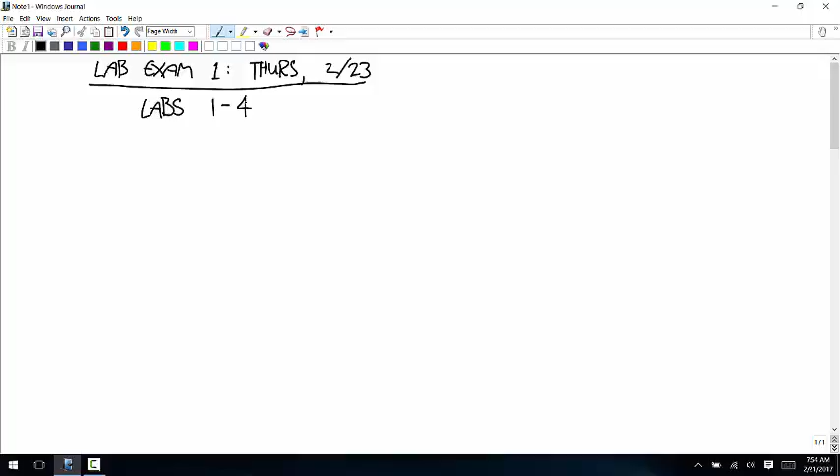Okay, so there will probably be 1 or 2 questions on that. And what I want you to remember is just the basic trends, not about the method or anything, but just what did we find. So if you remember what we found, that was the one where we used a spreadsheet to calculate how long it would take an object to fall a certain distance without air resistance and then with air resistance, and you could compare and see in each specific case how much air resistance would affect the amount of time it took.

Let's see, what we found was, first of all, when we changed the masses, we did objects that had the density of steel, or lead was the one we did, and then aluminum, and then cork. So things that were the same size, but the mass was less and less. And when we dropped those from 1 meter, even the difference between lead and cork, air resistance didn't really change anything, right?

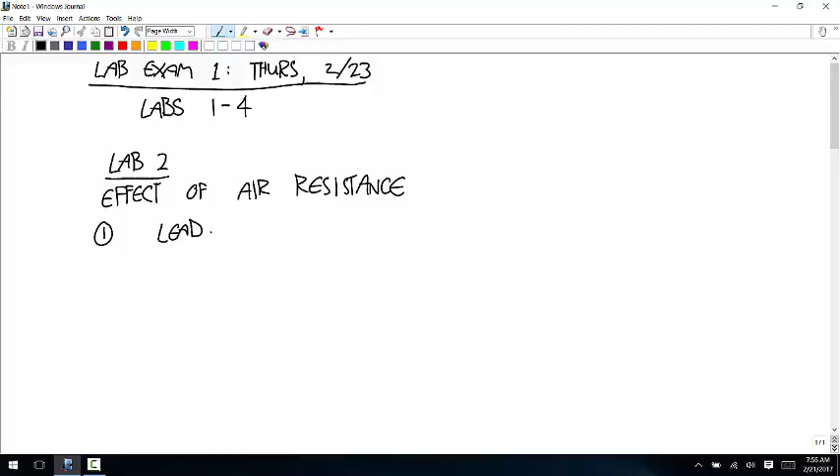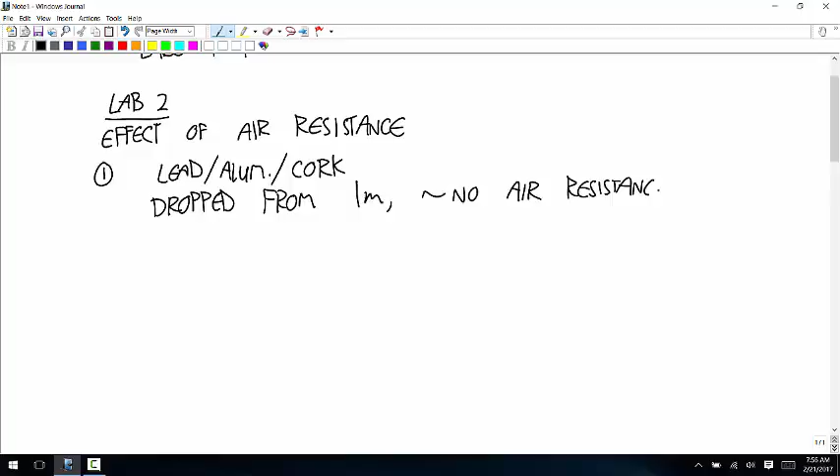So, lead, aluminum, cork, when we dropped it from 1 meter, there was essentially no air resistance effect. All 3 of those objects would have hit the ground at the same time.

And then those 3 things, when we dropped it from 10 meters, it still was a very minimal air resistance difference between the lead and the aluminum. The cork was a little bigger, but I think it was still pretty small. I don't remember exactly what it was. Maybe it was like a 4% difference or something for the cork. There was essentially no air resistance effect for the 2 metals.

And there was less than a 5% difference for cork. So even dropping them from 10 meters, there just wasn't much effect.

And then the next thing we did was we kept the mass the same and changed the surface area, the radius of the sphere. And what we found was, I think the two sizes were like a tennis ball. So we talked about an object that had a mass of 1 kilogram, and it was a tennis ball size compared to a basketball size.

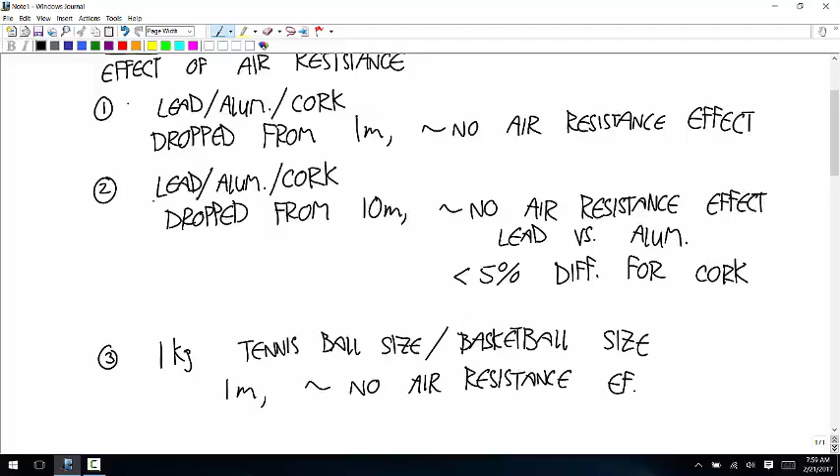And when we dropped it from 1 meter, there was basically no air resistance effect. When we dropped it from 10 meters, I think there was about a 10% difference. That was the biggest difference we saw in the whole lab.

So if you had to sum up all the results in one sentence, the most basic result from the lab was dropping things from 1 meter, 10 meters, air resistance didn't have that much of an effect. It probably had less of an effect than you would have guessed going into it. Other than that, there are some little differences you could notice, but basically I think the questions I'm going to ask are going to boil down to the fact that there wasn't much difference for those. You have to get things to a higher speed than that if you're going to make those kind of changes in density, those kind of changes in radius, in order to see a big difference due to air resistance.

Any questions about that particular thing? Okay, so that's kind of lab 2 in a nutshell. Any other questions about the lab test?

This is particle kinetics.

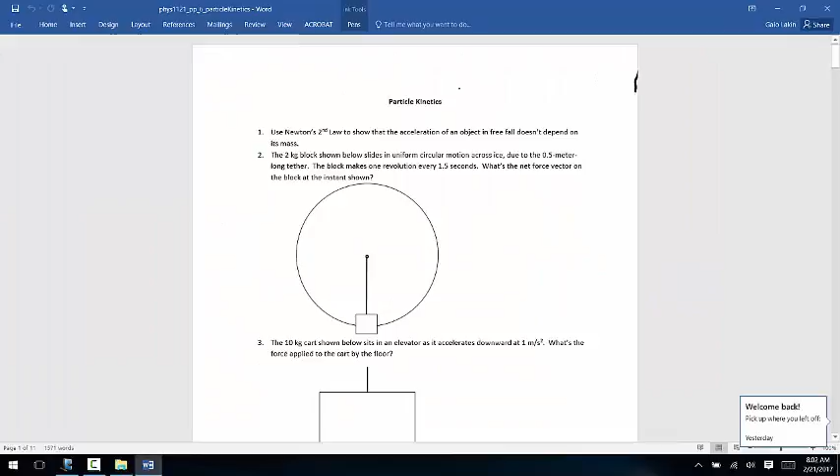Okay, so number 8. A car is accelerating backwards. It gives you the acceleration of the car, and a coffee cup falls. What acceleration would the coffee cup have according to the person driving the car? What would it look like?

First, what would its acceleration look like to someone outside the car? So somebody's looking at this thing going by as the coffee cup falls. They measured it or videotaped it. What would it look like the cup and the fluid in the cup was doing? And second, what would it look like to the person inside the car?

And third, which of those is suitable for using Newton's second law? So those are two different measures of acceleration. The person on the street sees an acceleration, the person in the car sees an acceleration. Only one of those is acceptable for using in F equals ma. And then the last part is calculate the net force.

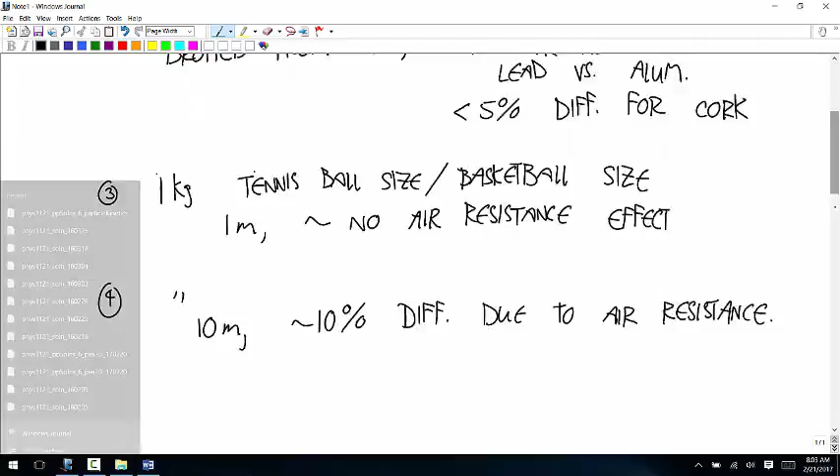Okay, so the car is accelerating backwards at 4 meters per second squared. Number 8, particle kinetics.

Okay, so a car is going this way. Let's say this is the positive direction, usually this would be the positive x direction. It says the acceleration of the car is -4. So is the car speeding up or slowing down? This car slams on the brakes. The acceleration is this way at 4 meters per second squared.

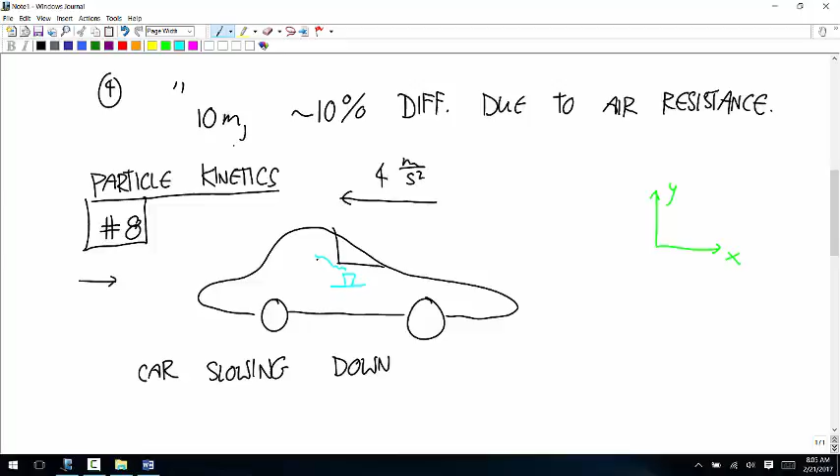Inside here, there's a coffee cup that falls off the dashboard or whatever. So part A: what's the acceleration observed by a camera on the ground?

You know, outside the car. And anything in free fall to a camera that's fixed to the ground, the acceleration is just down at 9.81 meters per second squared. So acceleration of the cup relative to the ground is just 0, -9.81 meters per second squared.

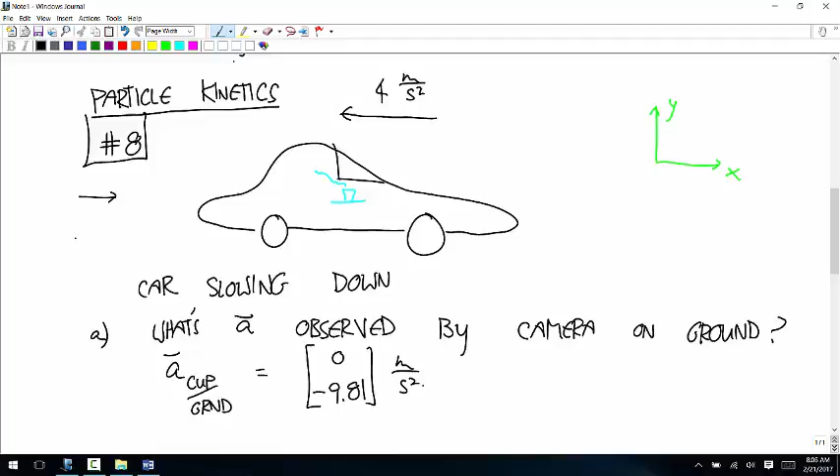So now, what's the acceleration observed by a camera in the car? The relative motion equation says acceleration of the cup relative to the ground is equal to the acceleration of the cup relative to the car plus the acceleration of the car relative to the ground.

So 0, -9.81 is equal to the acceleration of the cup relative to the car plus the acceleration of the car relative to the ground. This acceleration was given. It's 4 meters per second squared in the negative x direction. So this is just -4, 0.

And so the acceleration of the cup relative to the car, just do the algebra. You can add +4, 0 to both sides, and you get 0, -9.81 plus 4, 0. And so you get 4, -9.81.

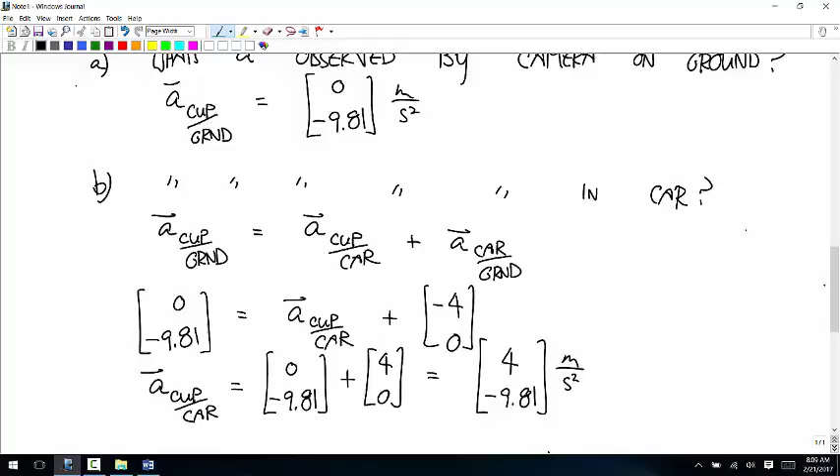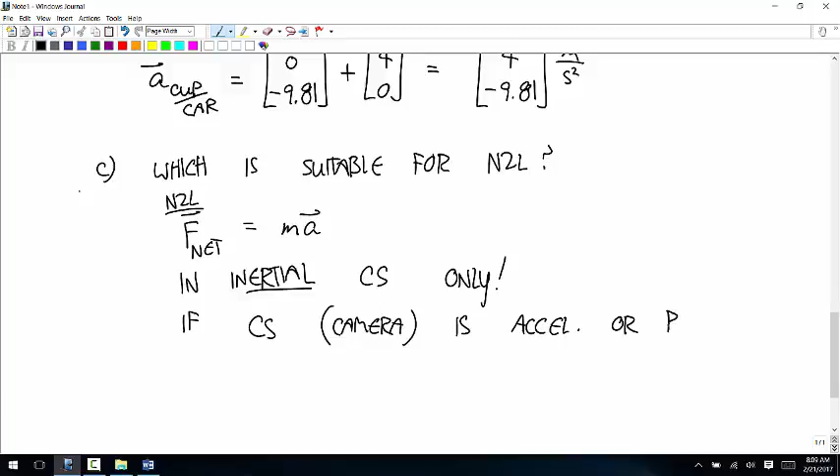You have to use inertial coordinate systems. It's called an inertial coordinate system. It doesn't work with coordinate systems that aren't inertial. So what that means is if the coordinate system—and you can think of that as the camera—is accelerating or rotating, you can't use its acceleration in Newton's second law. Exclamation point.

Okay, so which one of those two cameras is accelerating or rotating? The one on the street, on a tripod, or the one that's mounted to the car? The car. The car is accelerating—I told you what that acceleration is. And so the camera that you use inside the car, you can't use that data for Newton's second law. So this acceleration of the cup relative to the car, that's no good for Newton's second law. The acceleration of the cup relative to the ground, that is good for Newton's second law.

Well, actually, we'll talk about this a little more when we talk about gravitation. But it turns out a camera that's mounted to the ground isn't an inertial coordinate system either, because the Earth is rotating and hurtling through space. But the speed that it's rotating is really slow.

People are capable of putting together careful enough measurement equipment that you can tell the Earth is accelerating. But for most measurements, it's close enough to being an inertial coordinate system that we can use it.

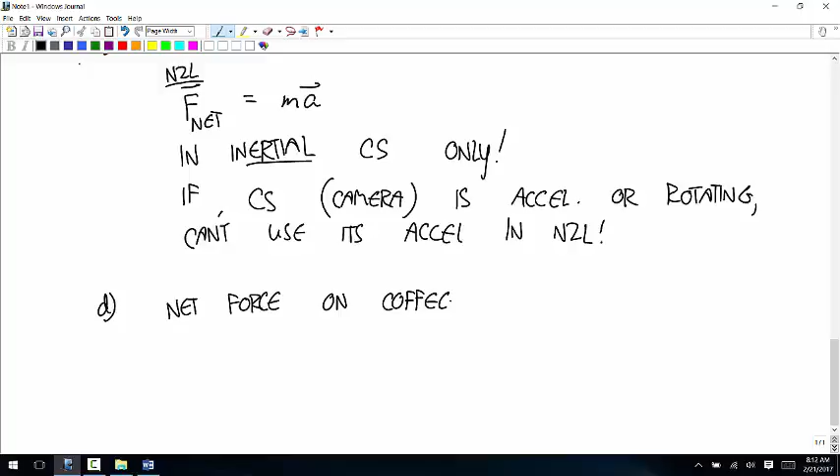Well, this is going to be sort of underwhelming. The net force is equal to the mass of the coffee cup times the acceleration of the coffee cup in an inertial coordinate system. So that's 0, negative 9.81, or we can write that as m times 0, negative g. So the net force is just 0, negative mg. The only force on the coffee cup is the weight.

Sometimes there are cases where it's useful to measure what forces it appears like are happening. These are like fictitious forces - to somebody inside the car, it would look like there's a force acting on the coffee cup accelerating it forward. You hear people talk about that stuff, and I think you hear about those kinds of things more often than you should, just because it's a more fun way to think about it - like there's this imaginary force making the thing accelerate.

But this is really the true story: you find a coordinate system that's inertial, that's not accelerating, you measure the acceleration in that coordinate system, and then use that to give you the true forces acting on the thing.

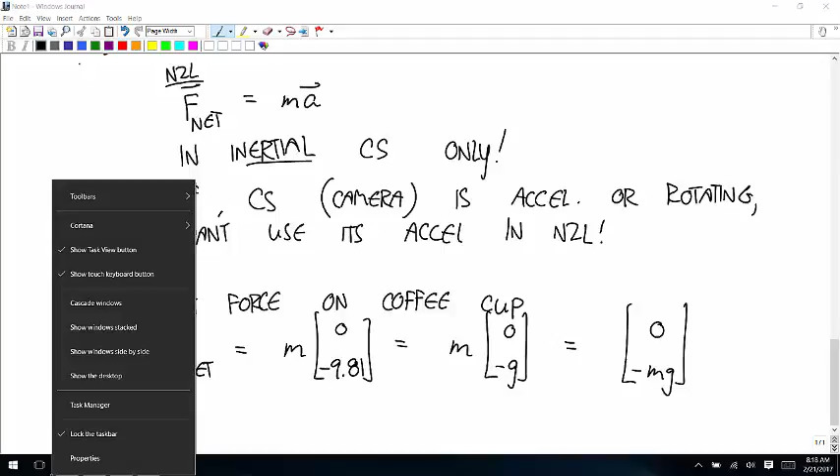Okay, so in this one, we're given the force vector as a function of time, and we're just asked to figure out the position vector as a function of time. It doesn't tell us the mass. The function is t, negative 3t.

So the force as a function of time is t, negative 3t. And since it doesn't give a mass, we'll say the mass is m. Newton's second law says, and this is the net force, F net is equal to this at any time. So Newton's second law says t, negative 3t, that's F net, is equal to the mass times the acceleration.

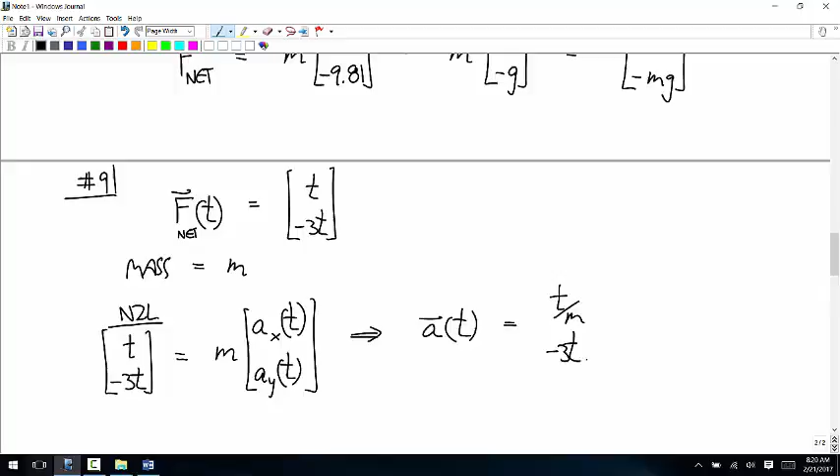I'll break it up into x and y components as functions of time. And so the acceleration vector as a function of time, you can solve those two equations just one by one, is t over m for the x component and negative 3t over m for the y component. So that's the acceleration.

Any questions about that part? So if you're given acceleration as a function of time, you can use Newton's second law to calculate net force as a function of time. If you're given net force as a function of time, you can use Newton's second law to calculate acceleration as a function of time. And then from there,

it also tells us that its position and velocity are 0 at time 0. So v of 0 is the 0 vector, and p of 0 is the 0 vector. And now we're just going to do the differential equation, integrate the acceleration to get the position. The velocity is the integral of the acceleration. So velocity as a function of time is the integral of the acceleration with respect to time.

So that's t squared over 2m plus c1, and negative 3t squared over 2m plus c2. That's the velocity vector.

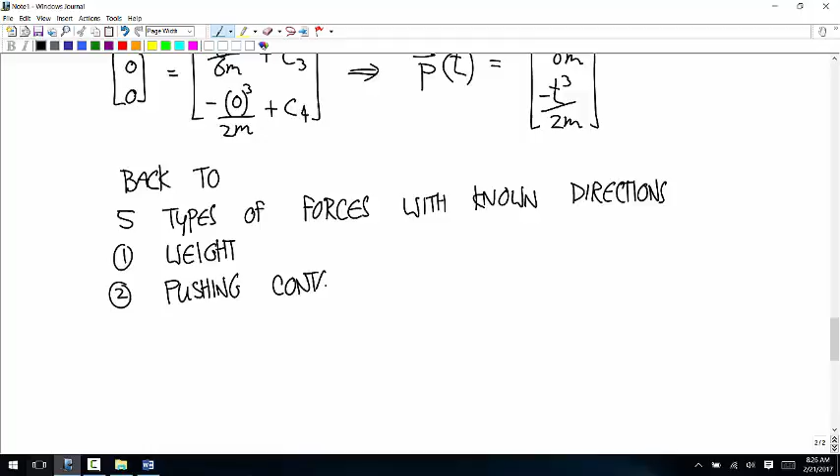These are, the first one is the weight. That's the easiest one. The second one is pushing contact. The third one is pulling contact. Usually, but not always, this involves cables, strings, and ropes. The fourth one is friction. And the fifth one is springs. Who remembers why we deal with springs?

Yeah, that's right. So in a lot of branches of engineering, like mechanical engineering, aerospace engineering, civil engineering especially, you deal with the elasticity of engineering materials. And springs are your first glimpse at dealing with this idea of elasticity. What elasticity means is if you apply a load to something, it deforms, and as soon as that load is gone, the deformation disappears.

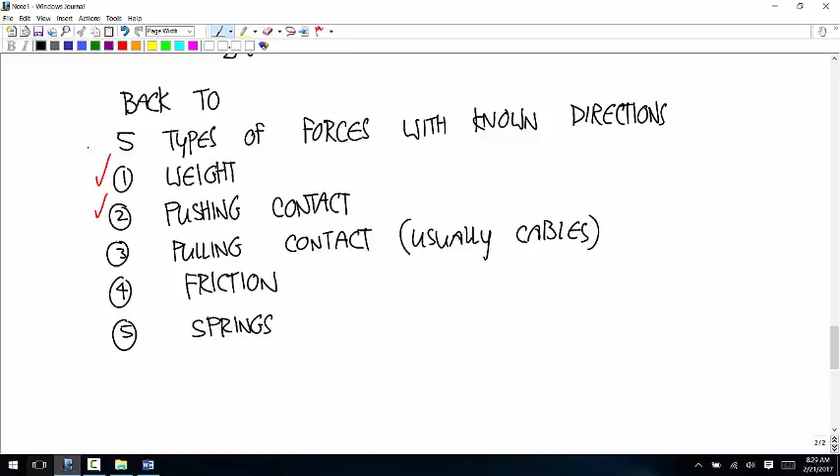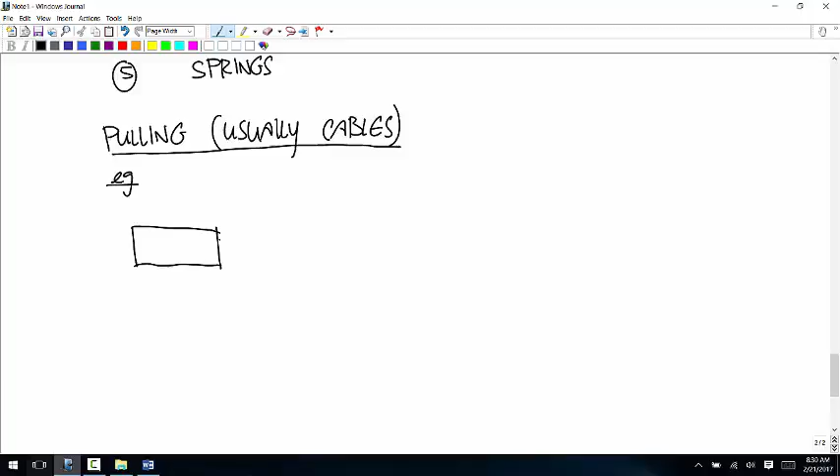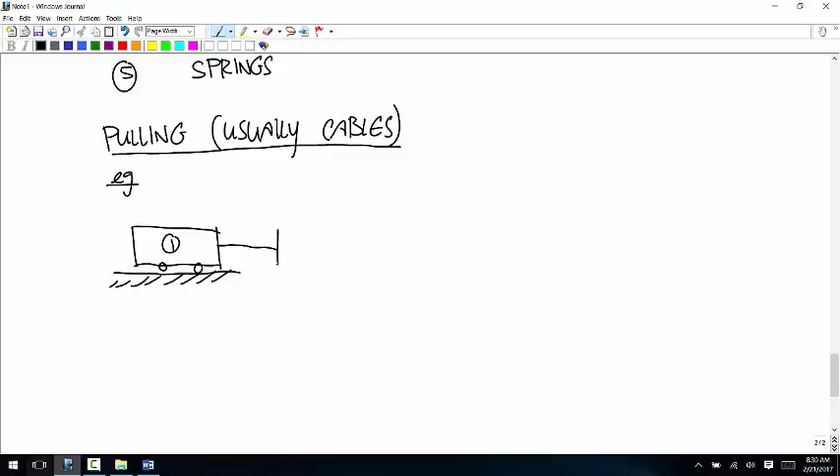So pulling, usually with cables. For example, the kind of problem that we'll see is if you have one cart rolling along the ground, connected by a cable to another cart, and then you apply a 50 Newton force here. Then, for example, what's the force the cable applies to cart 1?

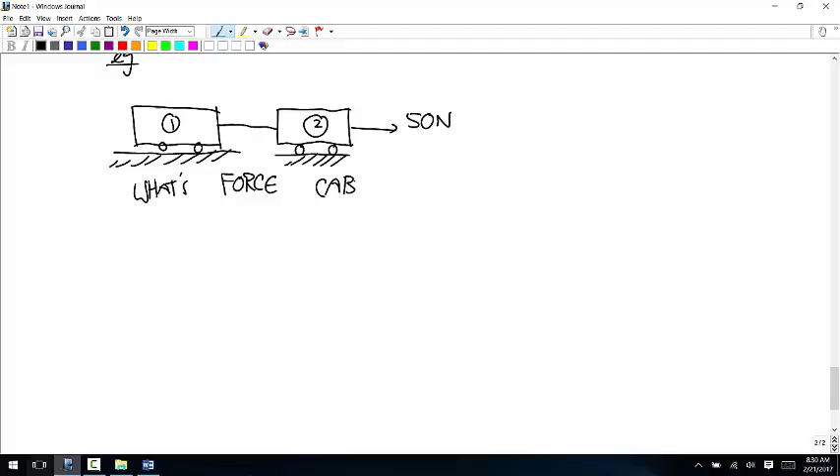Okay, and the rules for a pulling contact: the pulling force direction is parallel to the cable, and away from the chosen body.

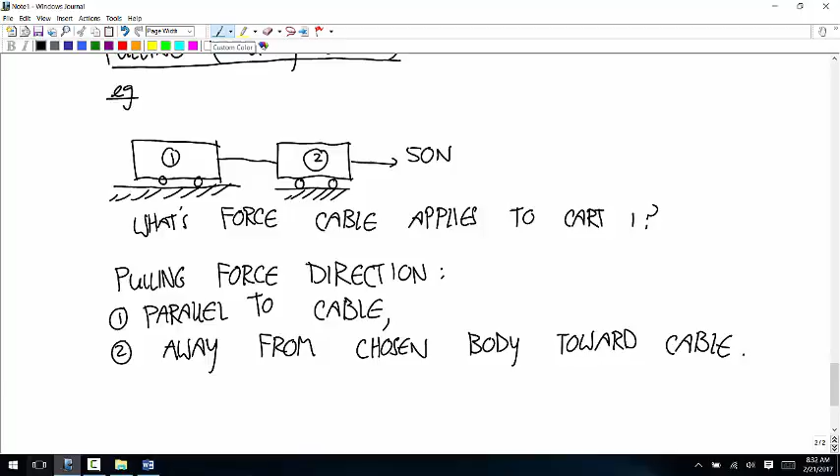One way to always get this right, that I think is helpful a lot of times in really complicated problems, is this: when you choose the body to isolate, you can imagine including just a tiny little bit of that cable that's connected to it. So you include a tiny bit of cable in the chosen body, and then the force applied by the cable acts straight out of, I'll call it the stump, a little tiny piece of cable, straight out of the stump. Okay, so let me show you a picture of what I mean.

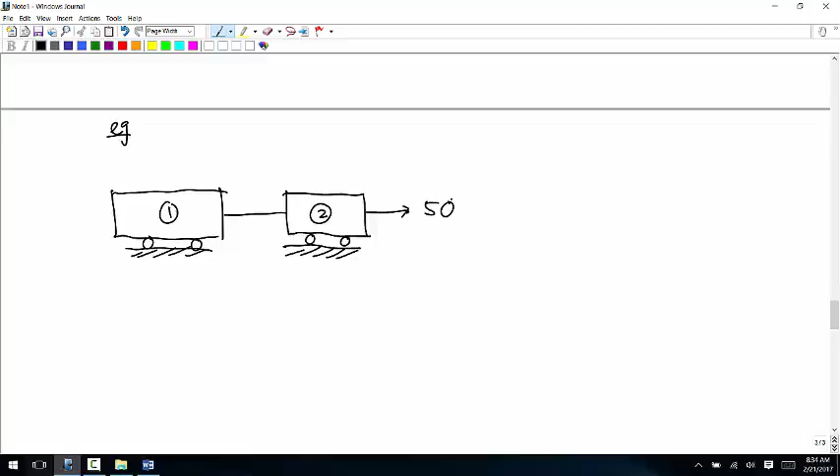So for example, if your chosen body... let me draw this setup that I had before again. So there's cart 1, cart 2, 50 newtons. Okay, so if we're going to isolate body 1, there's the outline. I'm going to include just a little bit of that cable on the end. There's the weight acting, there's a pushing contact from the floor, I'll call that normal 1. And then the only other force is the pulling contact from the cable, and that acts straight out of the stump, parallel to the cable, away from the chosen body. I'll label the magnitude of that force T for tension.

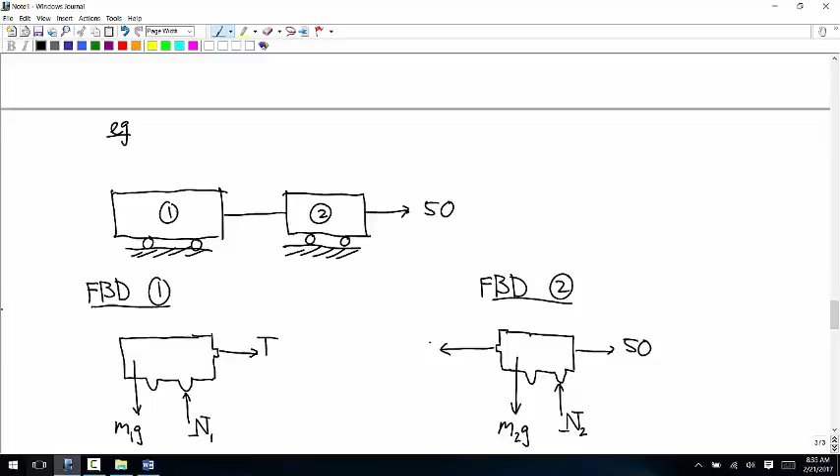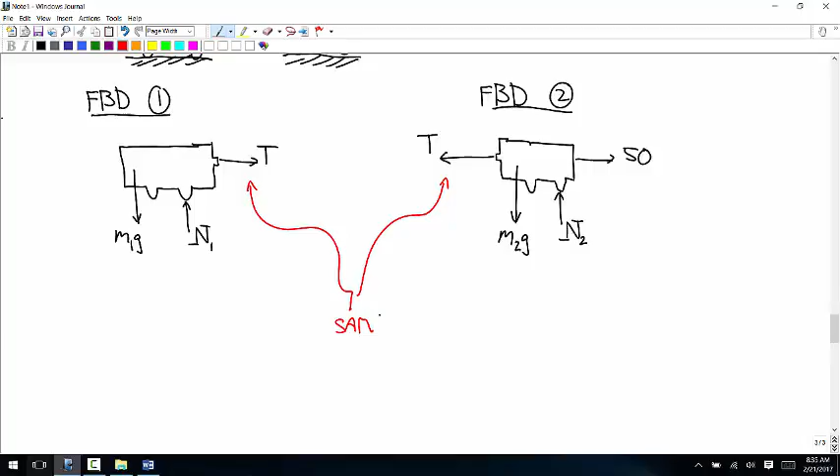And a free body diagram of cart 2: there's the weight of that cart, M2G, pushing contact from the ground, I'll call that N2, there's the applied force, 50 newtons. And now the pulling force acting on this cart goes straight out of this stump, that way. And since this is the same cable, the magnitude of that force has to be the same, so we're going to use the same variable label for it because it's the same cable. Any questions about that?

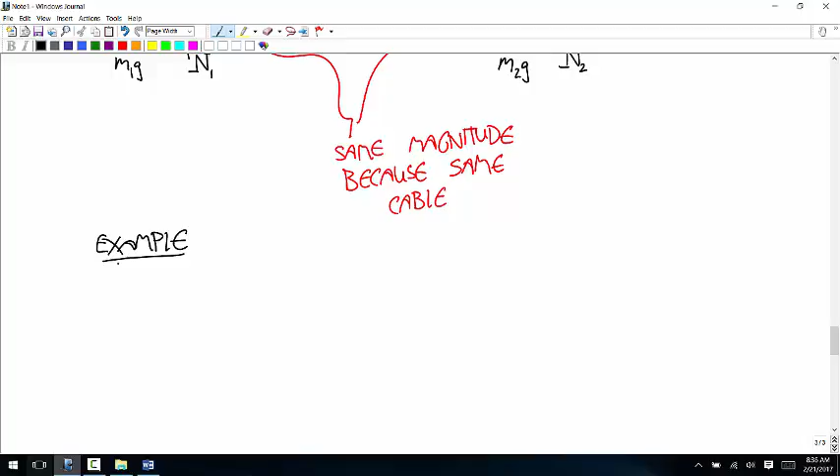Okay, well, let me do an example problem. It's going to basically look just like that one. Let's say that this cart on the left has a mass of 5 kilograms and is connected to a 2 kilogram cart, and there's a force of 20 newtons applied to the right. We want to calculate first the acceleration of the system, and second, the force vector the cable applies to the 5 kilogram cart.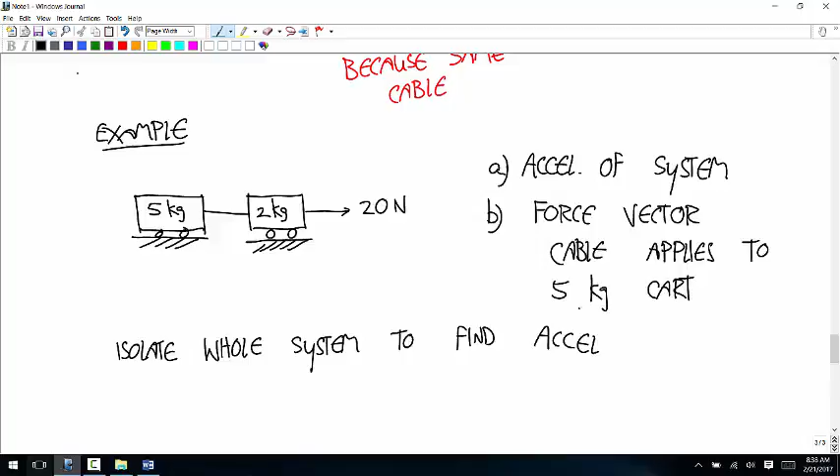All right, so to calculate the acceleration of the system, what do I want to isolate? This came up last time with the pushing contact problems - I always isolated the same thing first if we wanted to calculate the acceleration. Like if we had a bunch of carts or boxes in a row, we did that kind of thing, right? Just like one body. So what we want to do is isolate both of the two things together - the whole system, to find the acceleration. So a free body diagram of the whole system.

Looks something like this. So what loads are acting? What forces? From the ground.

Let's go in order. So the weight first. That's 7 kilograms times 9.81, so that's 68.67 down.

And then there's a contact force with the ground. I guess I'll break that up into two. So we'll say there's one force on this cart, I'll call that N5. And then one force on this one, I'll call that N2.

Then there's the applied force of 20 newtons. Any other forces?

There aren't any, because the cable is applying a force to this and a force to this, but that's not something happening to the boundary. We've gotten that out of the problem by putting those forces all inside what we're isolating. But that's an example of why it's so important to draw an outline with no internal details, to be clear about what are the forces applied by the outside world and what are the things that are totally internal.

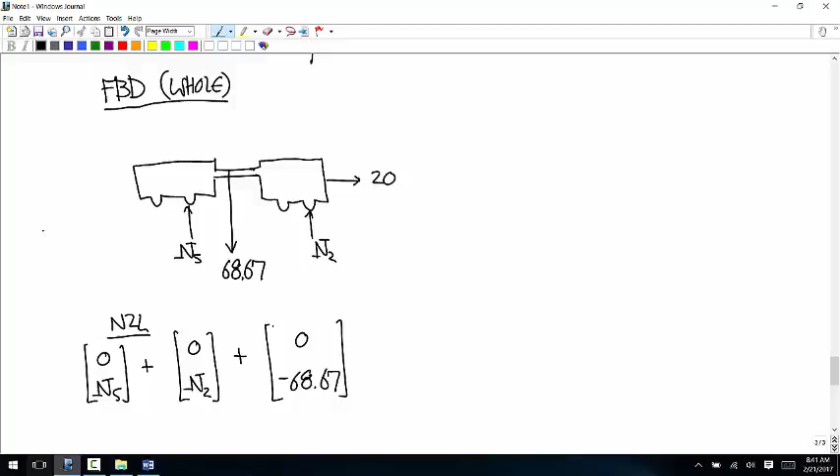So Newton's second law says: 0 N5, that's in the positive y direction, plus 0 N2, plus 0 negative 68.67, plus 20, 0.

That's the net force, and that's equal to the mass times the acceleration. The total mass is 7. Do we know anything about the acceleration?

We do know one thing, and this is something that in order to solve a problem like this, you're always going to have to recognize, and it'll come up in a lot of these problems. This thing is just rolling along a surface, right? So it's not going to jump, and it's not going to sink. So all of the motion is just happening along the x-axis, and we don't have to guess about whether it's going to accelerate left or right. All we have to do is say it's going to be in the x-axis. We'll assume that it's in the positive direction, and it'll give us a negative number if it's in the negative direction. But we do have to say there's only going to be an x component.

So I'm going to write the acceleration as a0.

Okay, this gives two equations. The x equation says 0 plus 0 plus 0 plus 20 is equal to 7a. And the y equation says N5 plus N2 minus 68.67 is equal to 0.

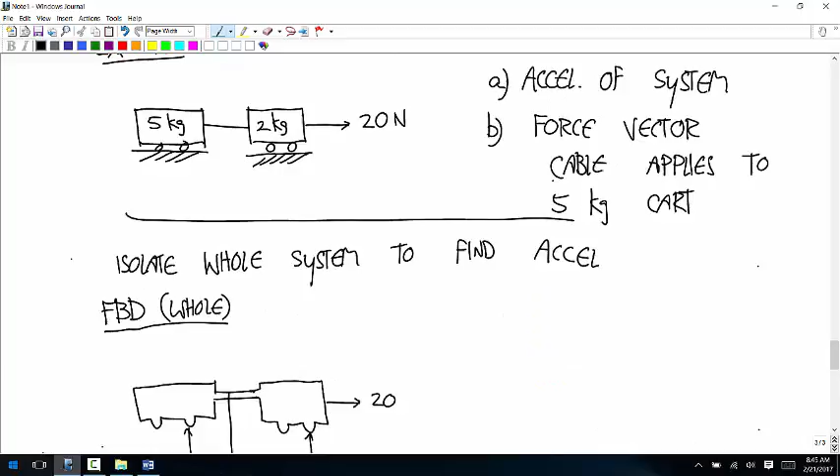So now this is where the pulling contact is going to come into it. So what do we want to isolate? The 5 kilogram cart or the 2 kilogram cart? The 5 would make more sense.

After I do this, I'm going to show you that we get the same answer if we isolate the 2 kilogram cart. But a free body diagram of the 5 looks like this. You have the weight of 5 times 9.81,

49.05. You have the pushing contact, N5. You have the pulling force straight out of the stub with a magnitude T.

Newton's second law says T, 0, plus 0, negative 49.05, plus 0, positive N5, is equal to the mass of what we're isolating. What's that? 5. Times the acceleration of what we're isolating. What's that? That's what we just solved for. Yep, 2.857, 0.

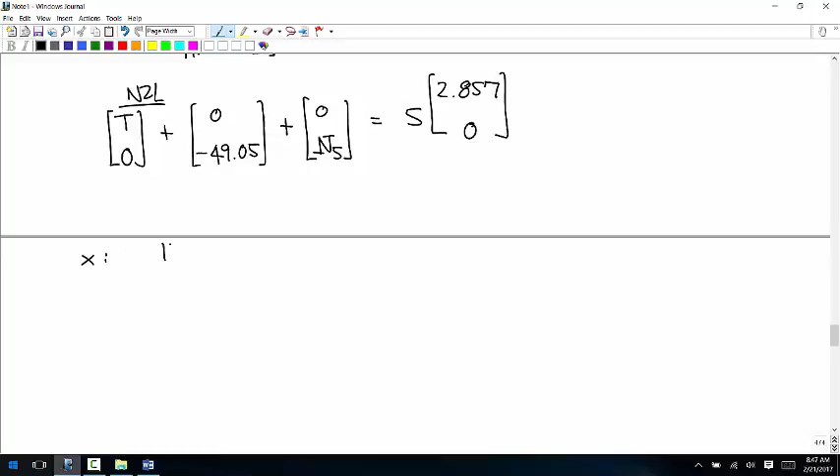So we get two equations. The x equation says T plus 0 is equal to 5 times 2.857, which is 14.285. The y equation says negative 49.05

This one is a perfectly good equation, but it doesn't help us with what we're trying to find, so forget that one. This one tells us that T is equal to 14.285 newtons. So that's basically it, that's the magnitude of the force, but we're asked for the force vector applied to the 5 kilogram. So how do we go from the value of T to the force vector applied to the 5?

It works just like the acceleration. This is the force on the 5 by the cable. So now we just have to take this T value and plug it in there. So the force on the 5 by the cable is equal to 14.285, 0. Any questions about that?

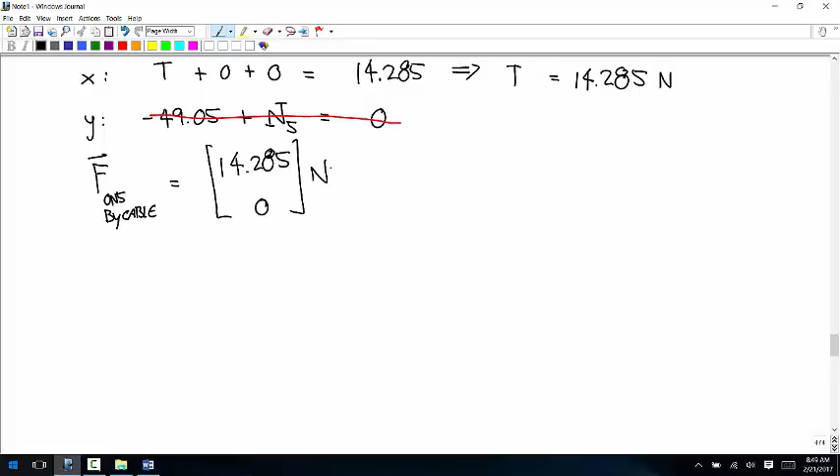Okay, so let's now isolate the, so we're done with it, we did it. But now let's see what happens if we would have isolated the 2 kilogram box.

Okay, so the free body diagram of the 2. There's the little bit of cable. There's a weight of 2 times 9.81, so 19.62. There's the normal force of the 2. There's the external load of 20. And there's the cable tension T going that way.

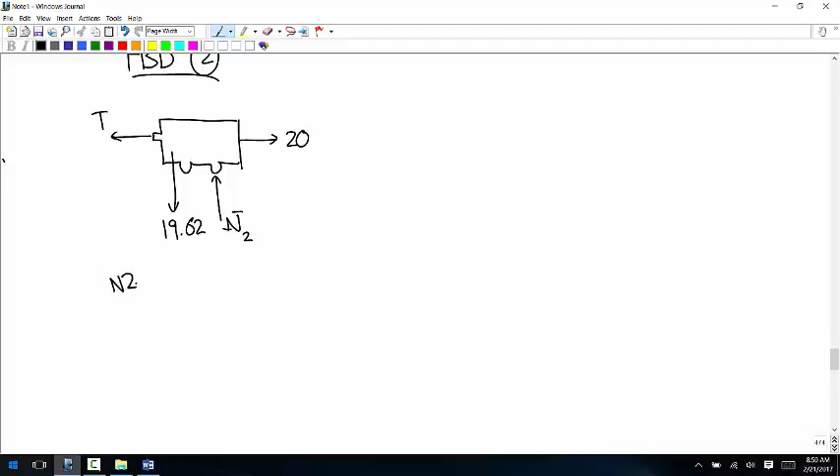So Newton's second law says negative T, 0, plus 0, negative 19.62, plus 0, N2, plus 20, 0, is equal to the mass 2 times the acceleration 2.857, 0.

So we get an x equation that says negative T plus 0 plus 0 plus 20 is equal to, what's 2 times 2.857? 5.714. I don't know if that's right, I bet 50% of those digits are right. It's important though, actually, so someone calculate that, please.

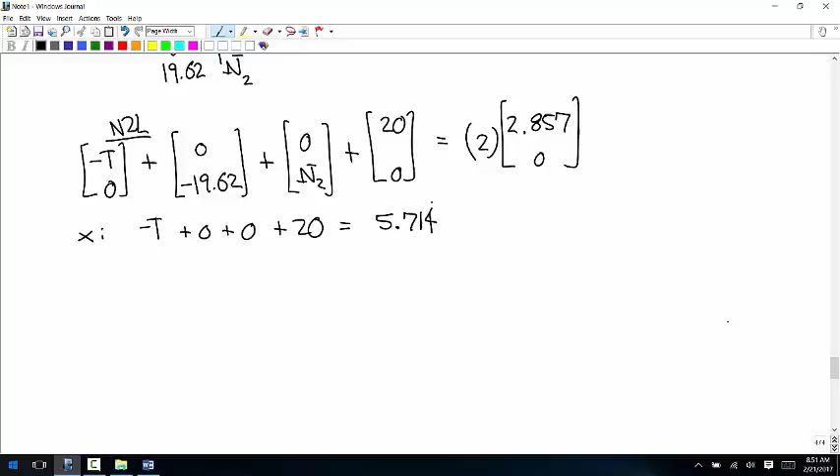Okay. Yay! Okay, and then the y equation says negative 19.62 plus N2 is equal to 0.

This one doesn't help for what we're trying to find. This one says T is equal to 20 minus 5.714. So what's 20 minus 5.714? 14.286. Okay.

So now, well, this doesn't give us the vector that the cable applies to the 5 kilogram box. We could use it to find the... Okay, well, what if we wanted the force vector applied to the 2 kilogram box first? This is the force on the 2 by the cable. And so we just plug this in here.

The force vector on the 2 by the cable is negative 14.286, 0. See how that negative came in there?

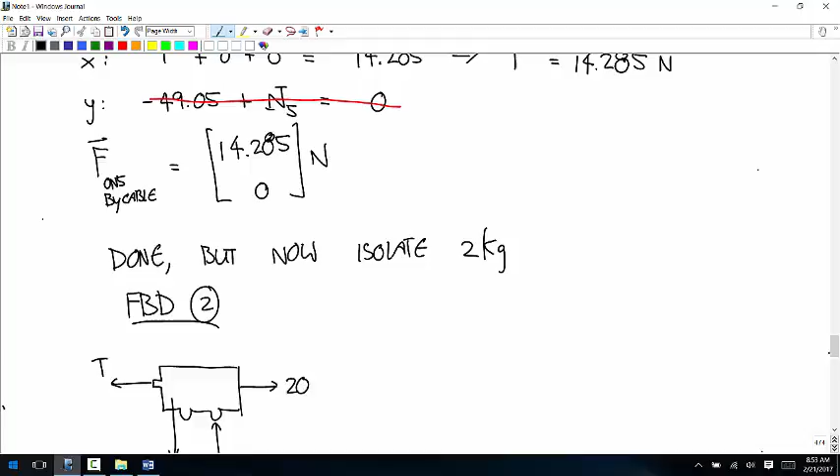All right, so now I want you to notice something really kind of surprising, cool about this. There's one digit wrong, we took this to 3 decimal places, and there was round off error of 1/1000th, but you can probably believe these are the same. Okay, so with this free body diagram, where the mass was different, there was no 20 newton force, we've somehow figured out the same tension for that cable that we did with this free body diagram, where the tension's going the other way, the mass is different, the force is there.

It's amazing, right? It's like magic. Like this one, that 20 newton force is there, but this one, like, how did it know?

But do you know how does it know? What?

Well, the reason that it knows is that when we did that first step of calculating the acceleration of the two carts, that acceleration encloses a lot of information, you know what I mean? And so then when we plugged that acceleration into the other two, it gave the extra bit of information that doesn't show up in that free body diagram. But it's cool how that works, I think. With these kind of problems where you have multiple bodies in contact like this, there's always a bunch of ways to go about it, and if you follow the steps correctly, you'll get the same thing.

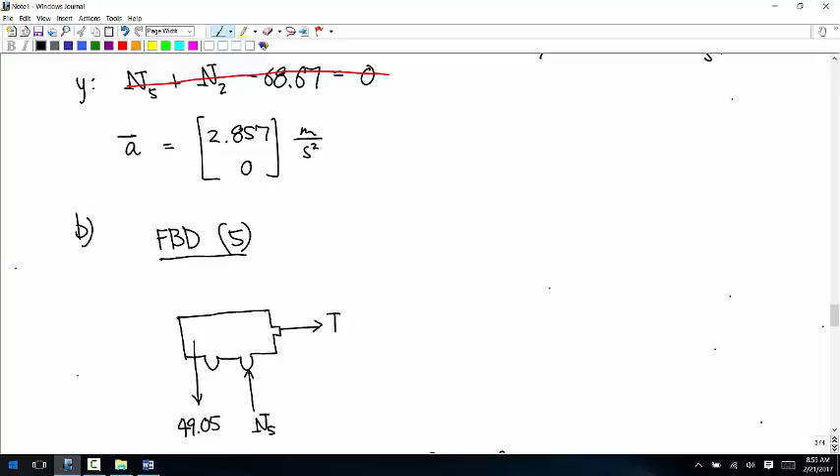Okay. I have a question before I go on, did I do a problem like this? I guess I can just look. Oh yeah, okay, I did.

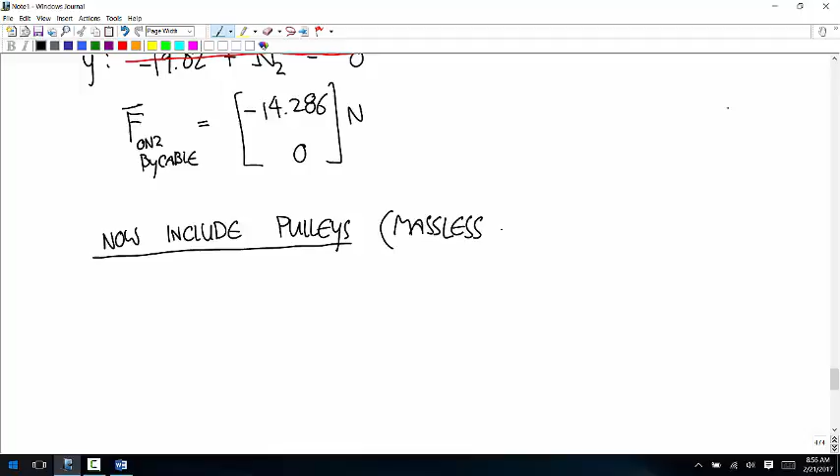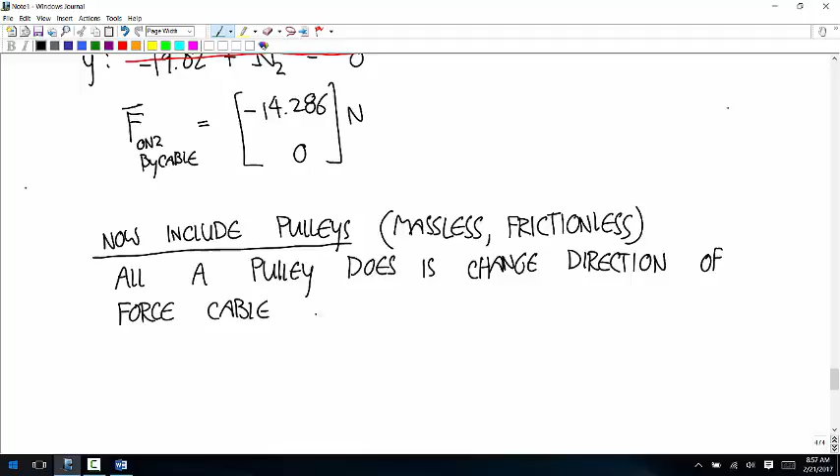So the next thing that we have to include is pulleys. And all pulleys do, and by the way, I'm talking here about massless and frictionless pulleys, which ends up being a perfectly fine assumption in a lot of cases, all a pulley does is change the direction of force that a cable applies. It doesn't change the magnitude of the force.

And I know when I first saw pulleys in a physics class, that confused me. I don't know if it's the same for you. It doesn't change the magnitude. But I remembered being told that pulleys were one of these, some small number of simple machines, and that you can use pulleys to reduce the amount of force that's required to lift an object. And so then when I started working through this stuff, I was like, well, that doesn't make sense.

Does it change the magnitude of force you need to apply, or doesn't it? The answer is a single pulley doesn't change the magnitude of the force. There is a smart way you can rig up a set of pulleys that does allow you to change the magnitude of the force, but it's not really the pulley that does it, it's the configuration. I'll talk about that.

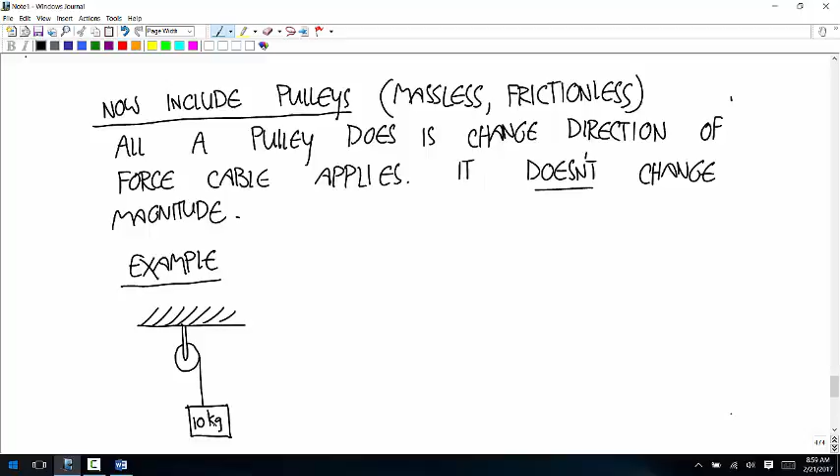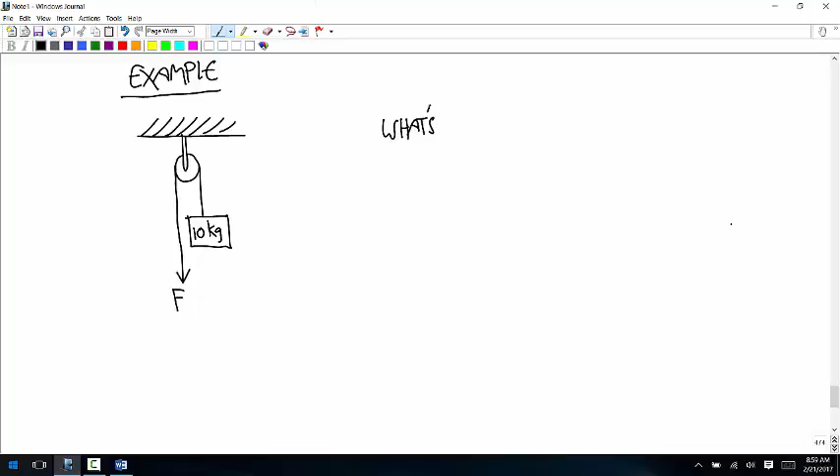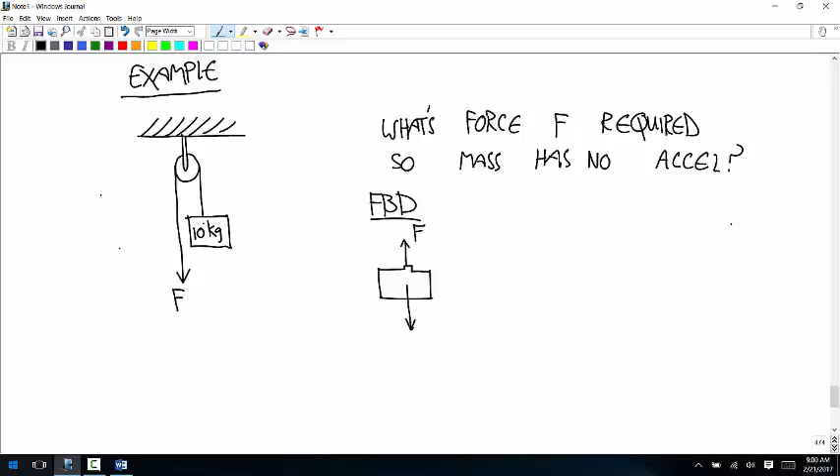But if you have a single pulley attached to the ceiling, and a 10 kilogram mass there, let's say you want to figure out the force required to hold this up. So what's the force F required so that, the way I'm going to say this, holding it up means there's no acceleration. So the mass has no acceleration. The way this works is I'll draw a free body diagram of the mass. The tension stays the same all the way through this cable, so I'm just going to call this force F. We have the weight of 10 times 9.81, so 98.1.

Newton's second law says 0F plus 0 negative 98.1 is equal to 10 times the 0 vector, because it's not accelerating. So the y equation says F is equal to... that weight is 98.1, so F is equal to 98.1 newtons. So what that says is the force you have to apply to this cable after it goes over the pulley to hold this up is exactly the same force that you would have to apply to just hold this thing in the air. The only thing that happened is now you're applying that force in the opposite direction. So the pulley changed the force direction, not magnitude.

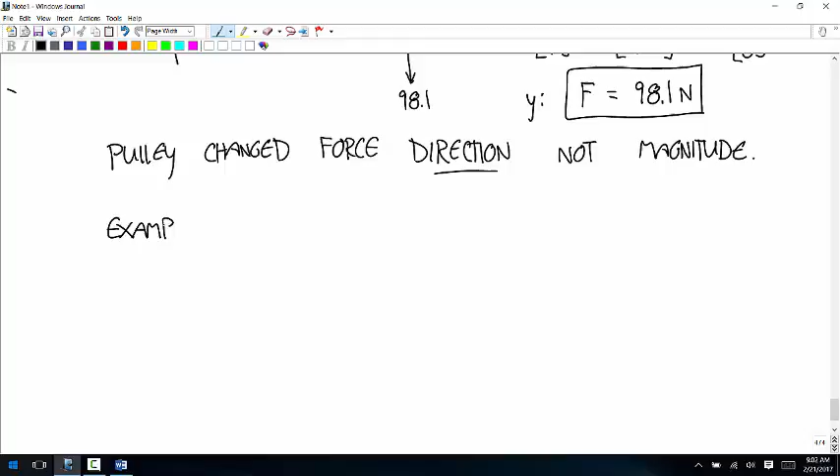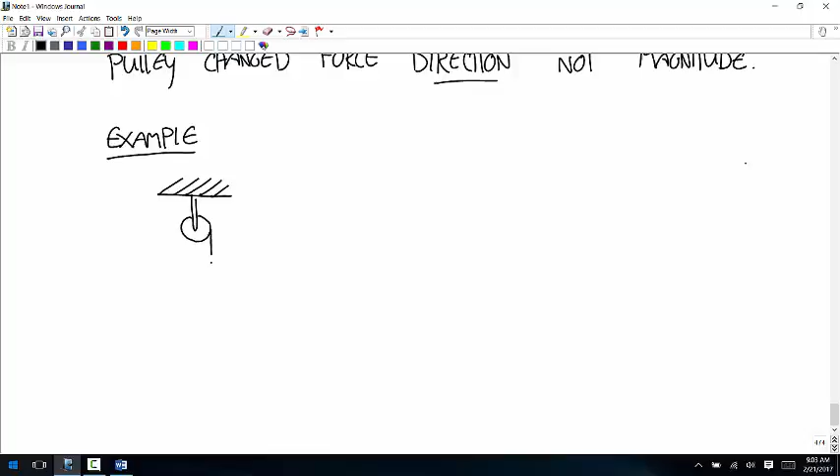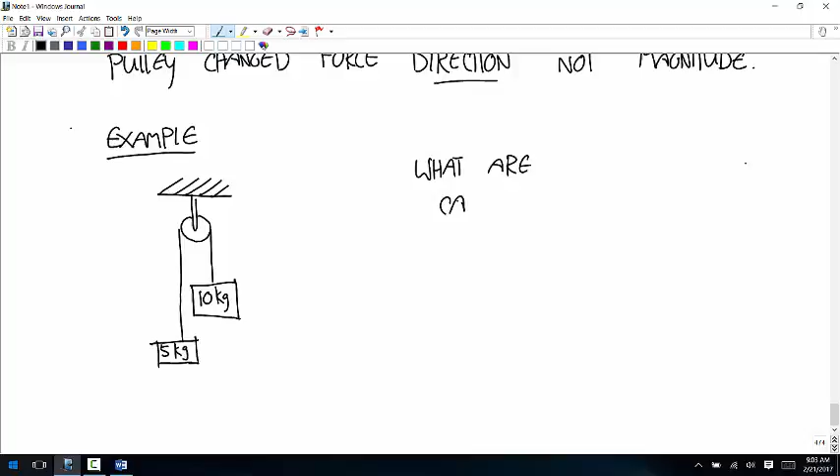Okay, so let's do another example. Let's say again we have a pulley hanging from the ceiling and a 10 kilogram mass over here, and a 5 kilogram mass here. And we want to know what the cable tension and the acceleration of the 5 kilogram mass are.

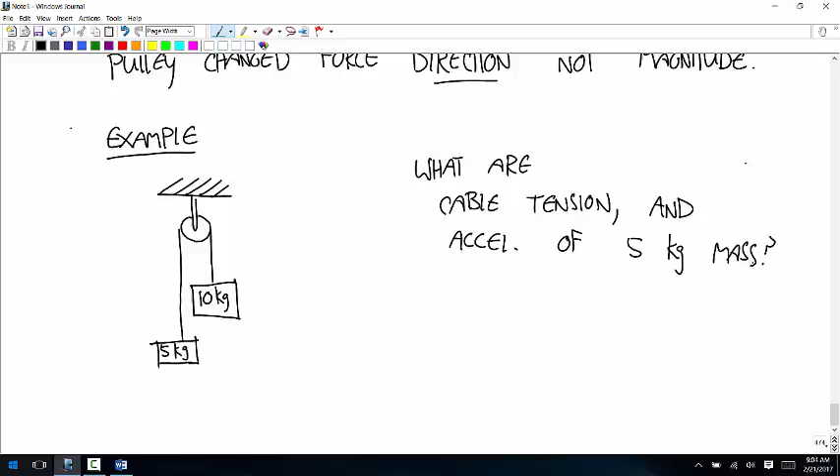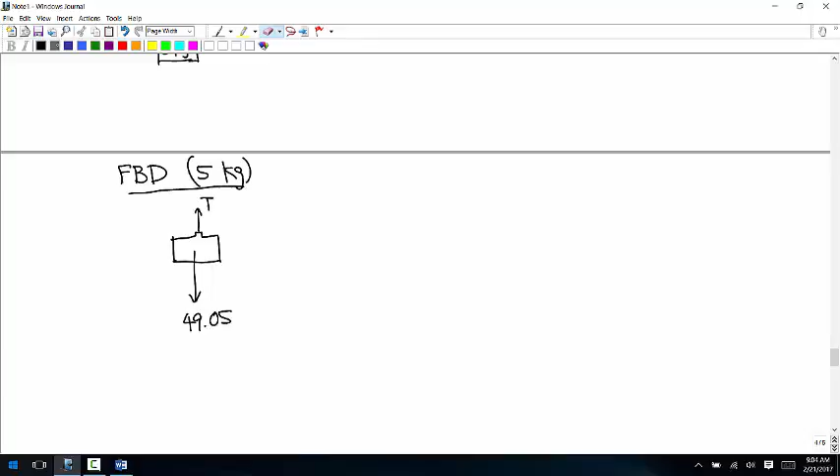Okay, so first I'm going to isolate and draw a free body diagram of the 5 kilogram mass. The weight is 49.05. What else is touching this? The cable. So that's drawn straight up with a magnitude T, we don't know what that is yet. And so Newton's second law says 0 positive T plus 0 negative 49.05 is equal to 5 times...

And now we have to think about what we know about the acceleration. How is this system going to accelerate? Well, everything is just happening vertically, right? So this thing, its height is just going to change. If we think about it a little bit, we happen to be able to tell that it's going to accelerate up. But just like with the rolling carts, we knew that the acceleration was only going to be in the x direction. With this, we know the acceleration is only going to be in the y direction. We're going to use that. So this is 0, I'll call this A5.

This gives two equations. The first one says 0 equals 0, so obviously that one is useless. But the y equation says T minus 49.05 is equal to 5 times A5. So this is a good equation, but we can't solve it yet because this is one equation with two variables. We're going to just set this aside, we'll come back to it later. But our goal is to come up with a system of equations that we can solve, where we have as many equations as we have unknowns. So we need the same number of equations and variables. So now we'll go to the 10 kilogram.

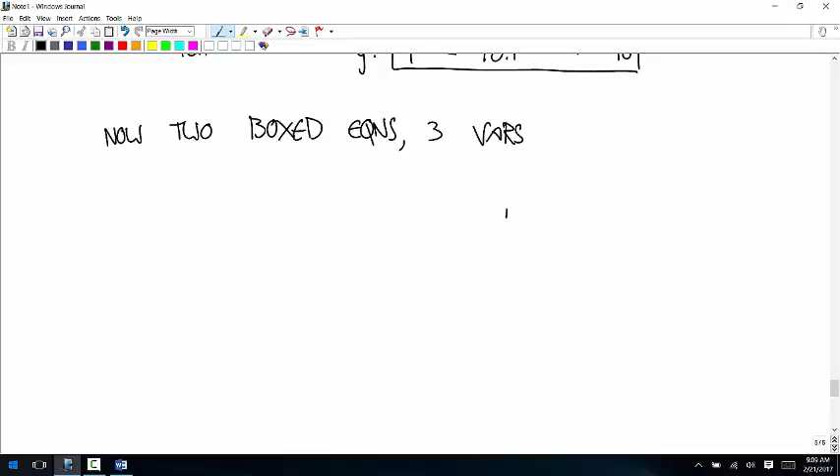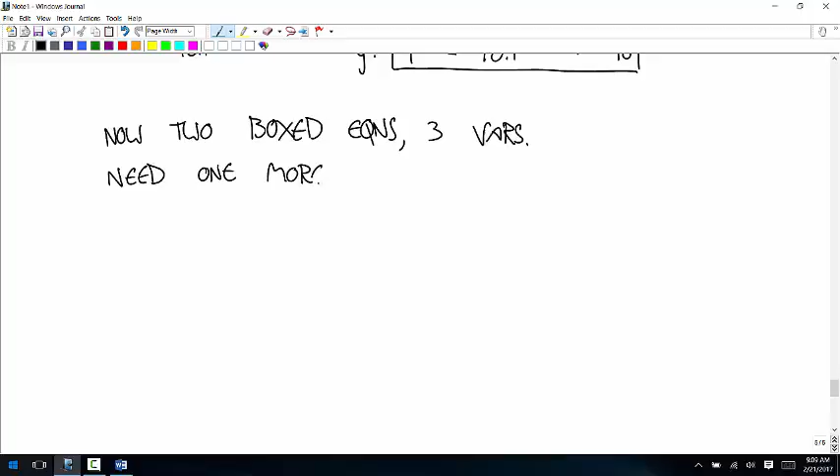How many variables do they have? 1, 2. This one has t, so that's not a new variable, but this is a new variable. So we have two boxed equations, three variables. So we need one more equation relating these variables in some way. An equation like that is called a constraint equation.

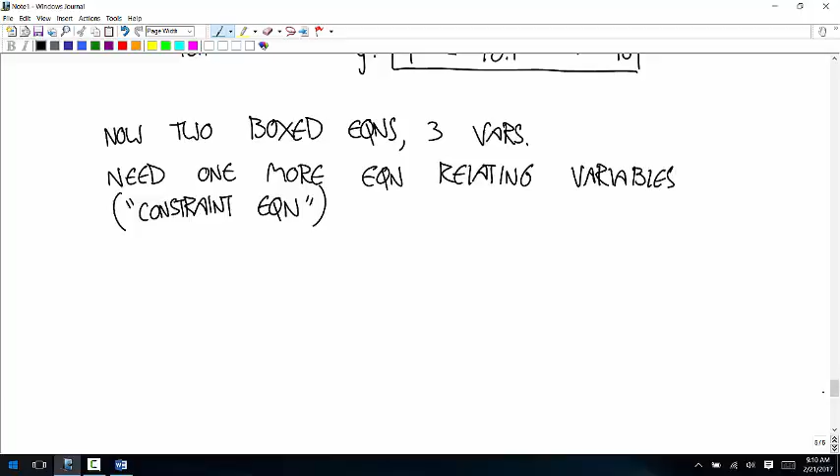Okay, so our three variables are t, the acceleration of the 5, and the acceleration of the 10. Look at this original system. Are there any relationships you can see between tension and that acceleration and that acceleration? There's one geometric relationship. Think of it this way: what happens if you move the 10 kilogram box down an inch? What happens to the 5 kilogram box? Goes up an inch, right?

And so what happens if this is moving in the negative direction at 5 meters per second? What's the velocity of this? Positive 5 meters per second. And so if this has a downward acceleration of 1 meter per second squared, what's the acceleration of this? If this is down at 1 meter per second squared, this is up at 1 meter per second squared. Our constraint equation is going to say that... which one do we want, the acceleration of the 5? Yeah. So our constraint equation says that the acceleration of the 10 is the negative of the acceleration of the 5.

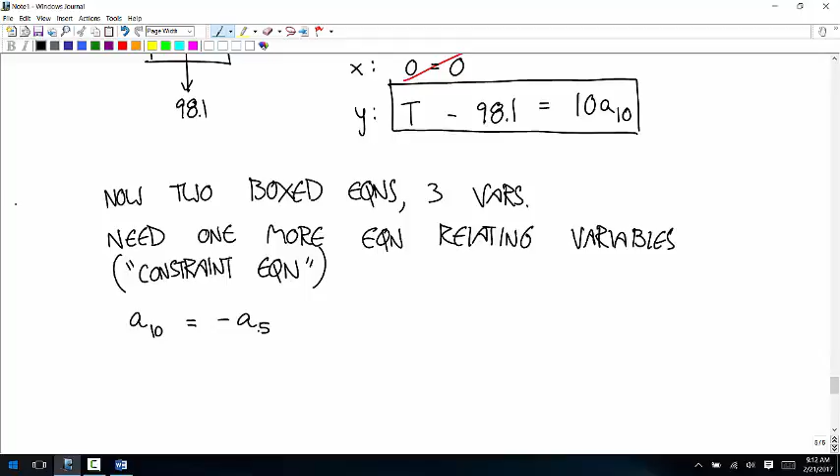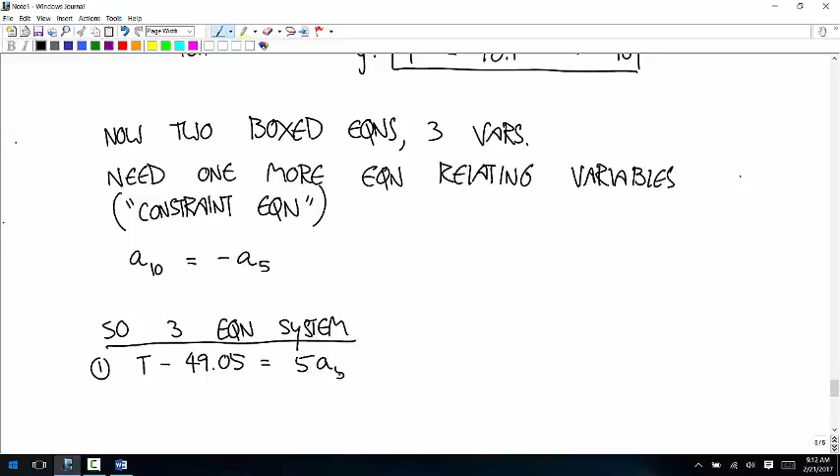So A10 is equal to negative A5. So our new three equation system: our first equation says t minus 49.05 is equal to 5a5. Our second one says t minus 98.1 is equal to 10a10. And our third one says A10 is equal to negative A5.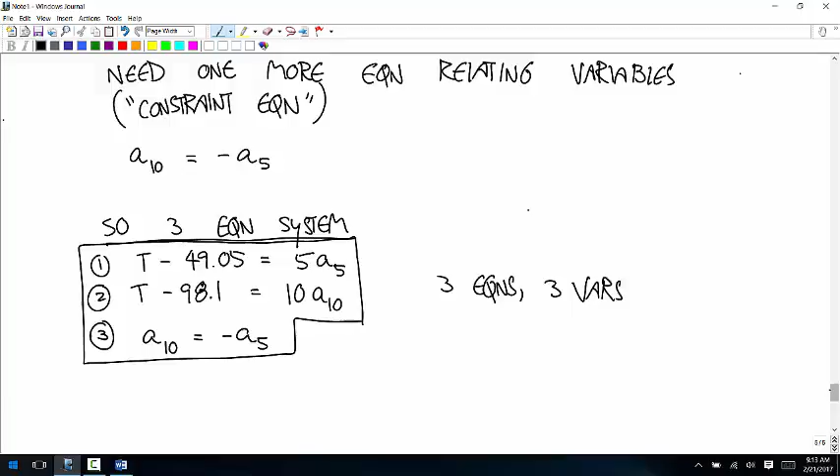That's 3 equations for 3 variables, and you can just solve that by substitution. We'll put negative A5 in for A10. So this gives us T minus 49.05 is equal to 5A5. The second one says T minus 98.1 — I'll substitute in equation 3, and that gives us negative 10A5. And then I'll subtract these two equations, and you get positive 49.05 is equal to 15A5.

And so A5 is equal to, what's 49.05 divided by 15? 3.27? 3.27 meters per second squared. And if we want the acceleration vector of the 5 kilogram box, we can plug that back into the acceleration vector we used in Newton's second law. So the acceleration vector of the 5, if you plug that back in, is 0, 3.27.

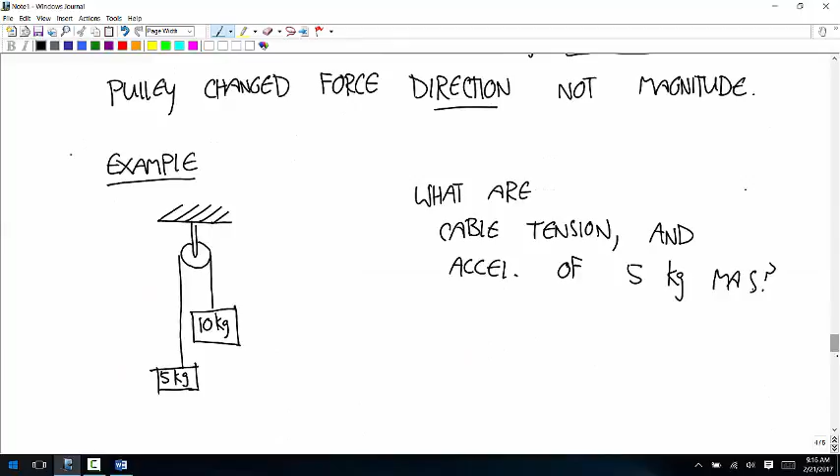One thing that's interesting about that is in the example I did right before, where you're just holding up a 10 kilogram mass, the tension in the cable was 98.1 newtons. Once you allow this thing to accelerate, that force changes. So you might think the tension in the cable is going to be the weight of one of those two masses, but it wasn't — it was actually somewhere in between the weights of those two masses. So that acceleration messes up some things about your intuition of what's going to come out.

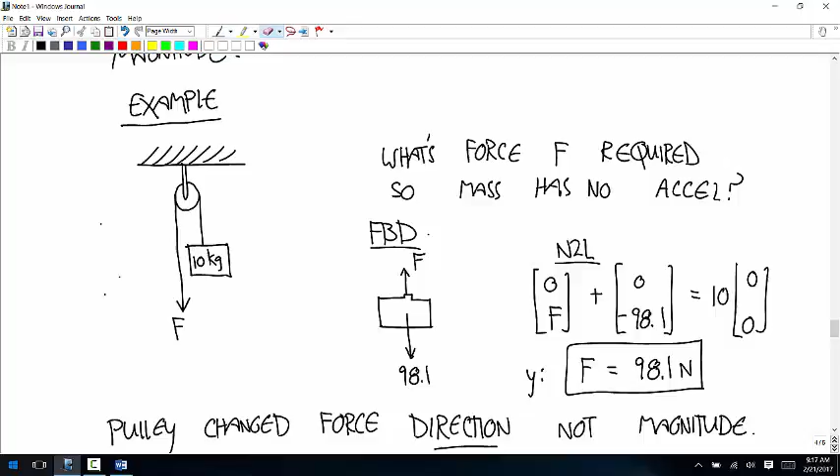Let's do one more example.

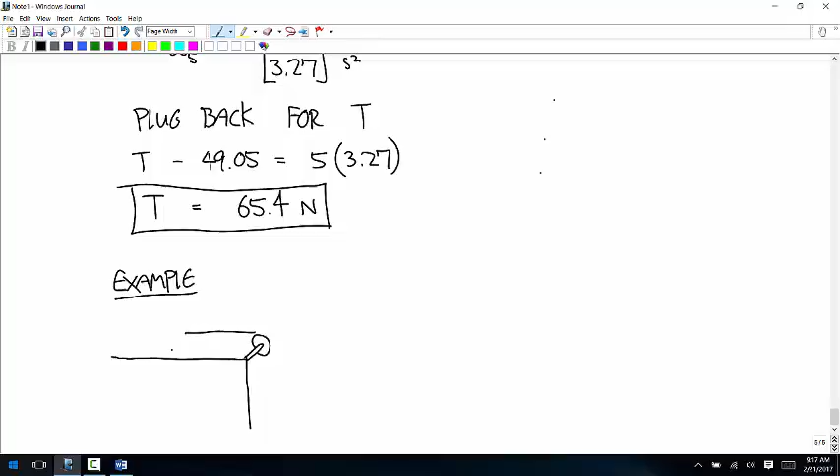So this time, let's say the pulley is on the corner of a ledge, and there's a cart here, and then a mass here. The rolling cart is 5 kilograms, the mass is 2 kilograms, and we want to know the acceleration vector of the 5 kilogram cart. The weight of that 2 kilogram mass is going to make it descend, and it's going to pull the 5 kilogram cart over towards the ledge. We want to see what the acceleration is going to be.

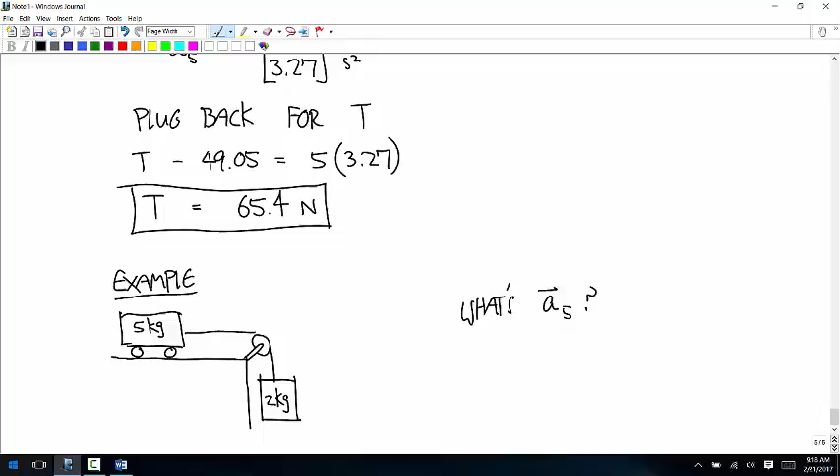The basic idea of this is pretty similar to the last example. It's just going to be a slightly different constraint equation.

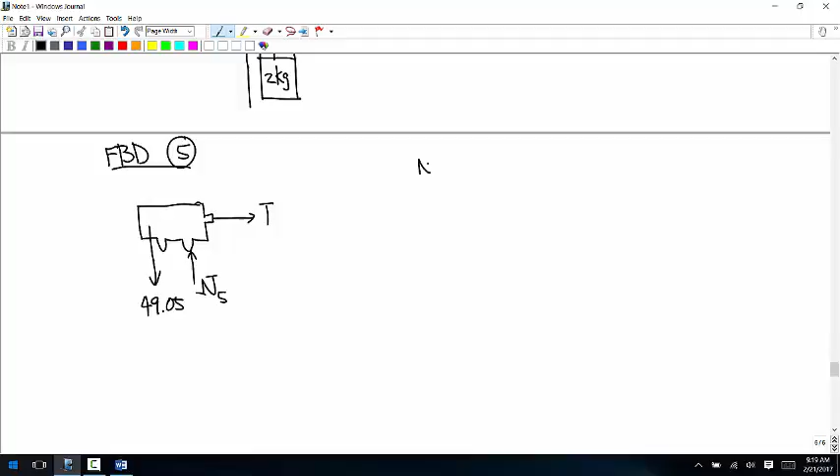So a free body diagram of the 5 kilogram: we have a weight of 5 times 9.81, a normal force I'll call N5, and then the only other force is the cable force. So Newton's second law says T, 0, plus 0, N5, plus 0, negative 49.05, is equal to... what do we know about the acceleration of the 5 kilogram? It's horizontal. And that's all we need to know.

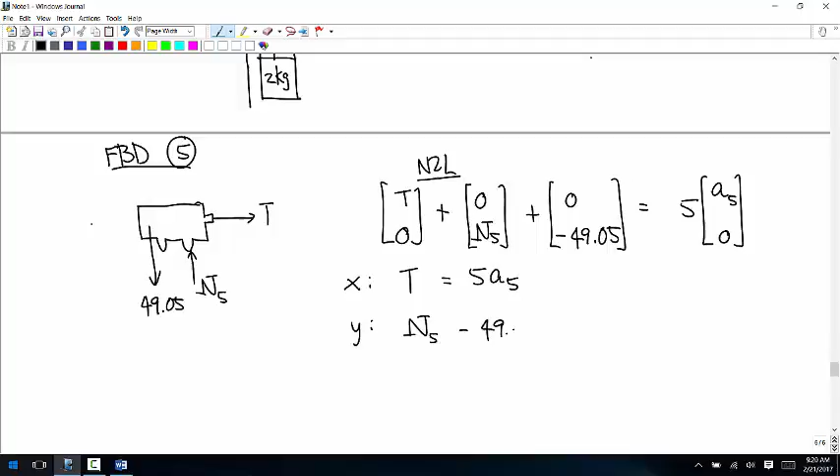We're not going to, even though it's easy to guess which direction it's going to be, we don't care about that. We're going to assume it's in the positive x direction. All we care about is that it doesn't have any y component. So this is equal to 5 times a5 for x and 0 for y. So we get an x equation that says T is equal to 5 a5, and a y equation that gives us some stuff, but it's nothing useful for what we're trying to solve. So we don't care about this one, we do care about this one. We can't use that to solve for anything yet because it's two variables with one equation, but we'll come back to that as a system.

And then a free body diagram of the 2 kilogram, the hanging mass. We have the weight of 19.62, and it's the same cable as before, so this is T. Newton's second law says 0, T, plus 0, negative 19.62, is equal to the mass times acceleration. What do we know about the acceleration of this body? It's vertical. So I'll write this as 0, A2.

The x equation says 0 equals 0, so we know we can't use that. The y equation says T minus 19.62 is equal to 2a2. So we have 2 equations. How many variables? Yep, so we need one constraint equation.

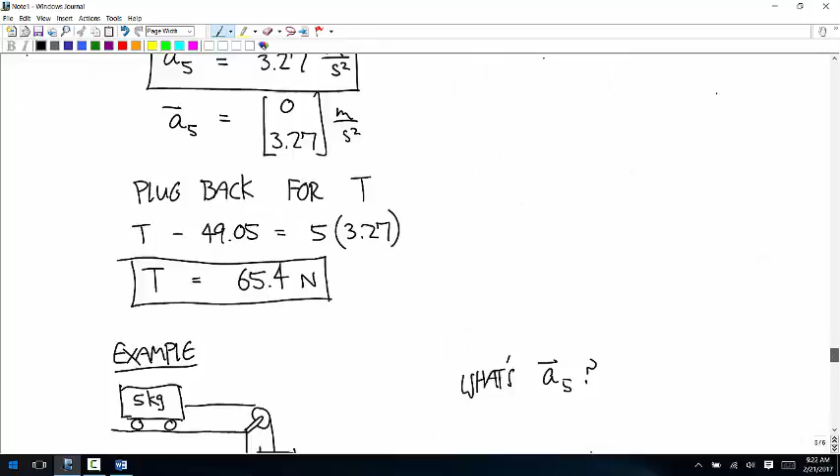So what's the constraint equation that makes sense here? I think the best way to think about these is to just think: one of them goes an inch one way, where does the other one go? So if this one goes an inch in the positive x direction, where does this one go? An inch in the negative y direction. So it's a 1-to-1 relationship with that negative sign, and the 5 is in the x component, the 2 is in the y component.

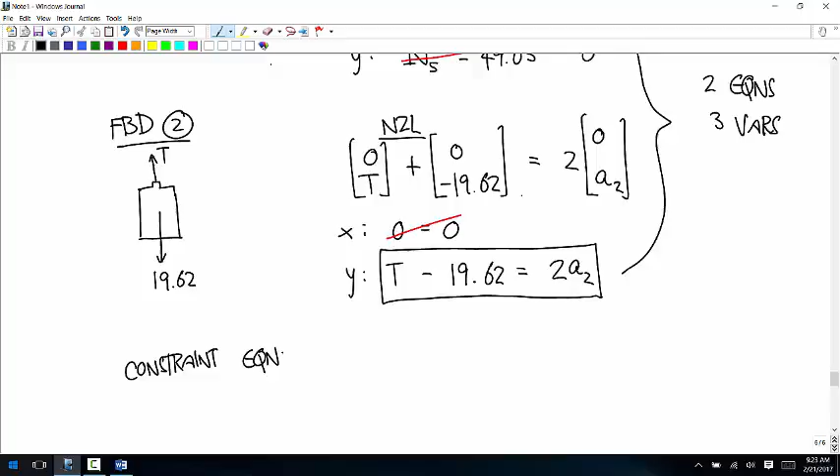So our constraint equation says A5 is equal to negative A2, or I guess I'll write it the other way: A2 is equal to negative A5, because what we're trying to solve for is A5.

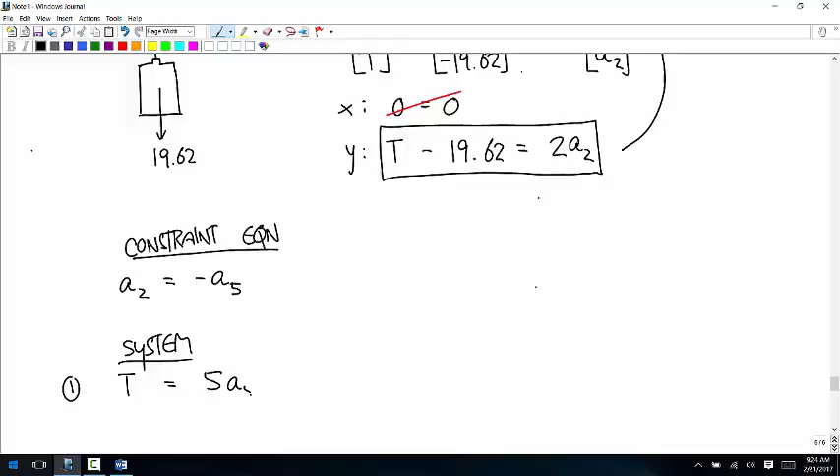So our system says T is equal to 5A5. The second one says T minus 19.62 is equal to 2A2. And then our third one says A2 is equal to negative A5.

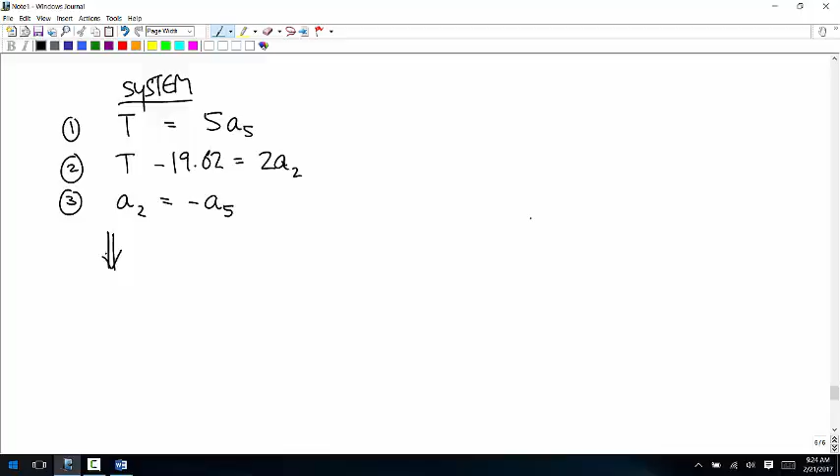I was just wondering why we don't have to write A2 and the negative 5. Well, it's because these are just variables, and so it just matters where we put it when we solve for that. Yeah, and then once we solve for those variables, we plug them back into the vectors.

So this says T is equal to 5A5. The second one says T minus 19.62 is equal to negative 2A5. And then I'll subtract these two. You get positive 19.62 is equal to 7A5. So A5 is 2.803 meters per second squared.

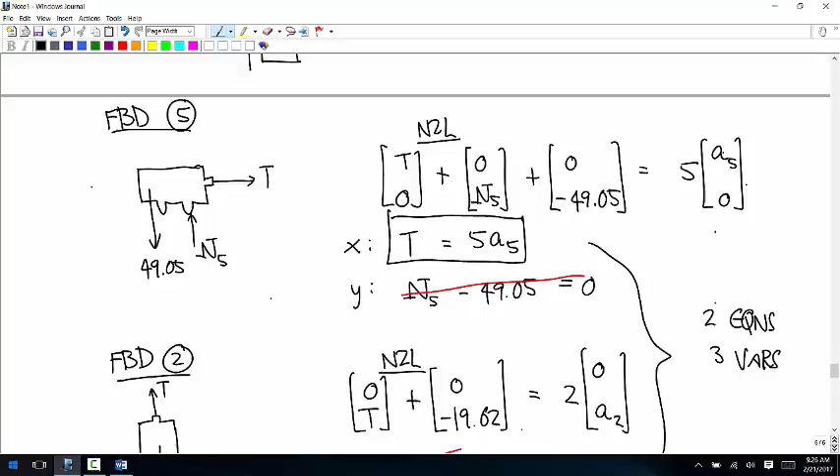And so now you can go back to Newton's second law for the 5 kilogram, plug that number back in there, and you get that the acceleration vector of the 5 is equal to 2.8030 meters per second squared. And then if you wanted to calculate the tension from that, you could.

Any questions about that?